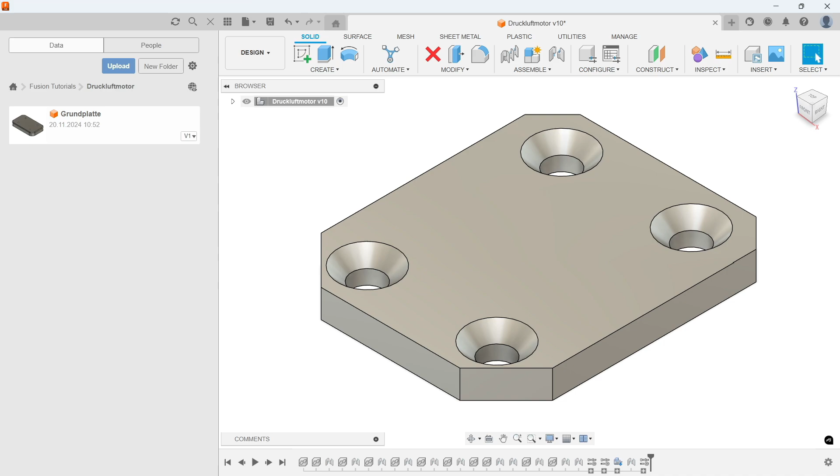It has 4 countersunk holes. While creating these holes, you will learn 3 new functions: how to reuse sketches, how to insert holes using the hole tool without a prior sketch,

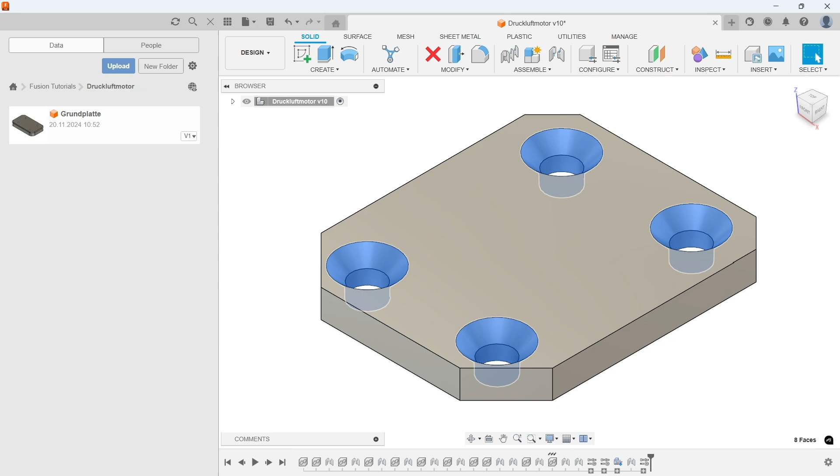and how to position them precisely using a rectangular pattern.

Furthermore, you will learn how to create the differently executed chamfers with just a single chamfer element.

At the end of the tutorial, we will show you how to change the material from steel to aluminum and display important component information such as mass, volume, and center of gravity.

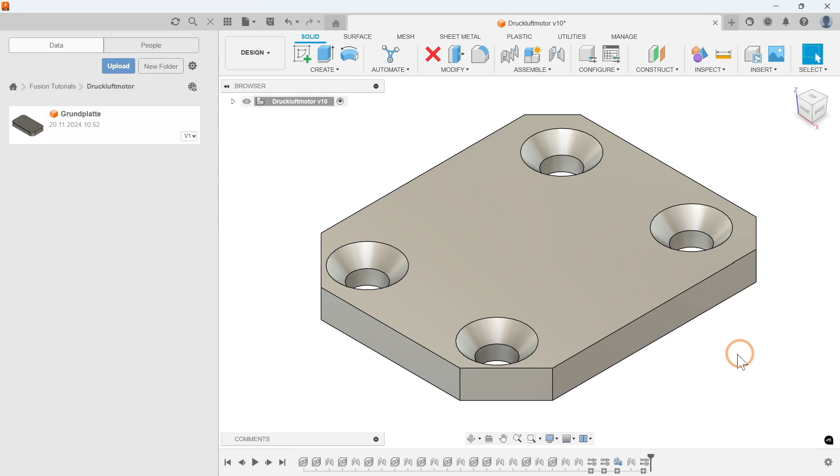We start with the construction by clicking on File and then on New Construction as before. It is advisable to save the component right from the beginning.

We assign a meaningful name to the cylinder head plate and confirm the entry. The file for the cylinder head plate is now added to our folder. To create more space in the workspace, we then close the data panel.

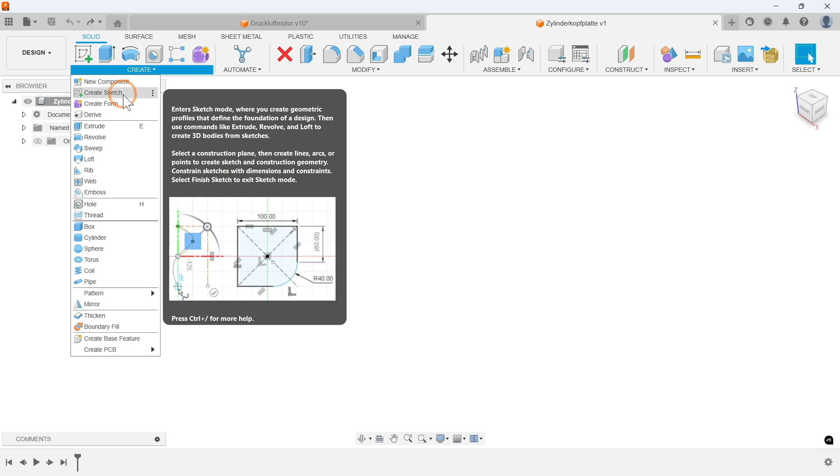As the next step, we create a sketch on the XY plane. We do this by clicking on Create Sketch and then selecting the XY plane in the browser or directly in the workspace.

As with the base plate, we now create a center rectangle starting from the origin, using the dimensions 25 by 30 millimeters. The input is completed with a click of the left mouse button.

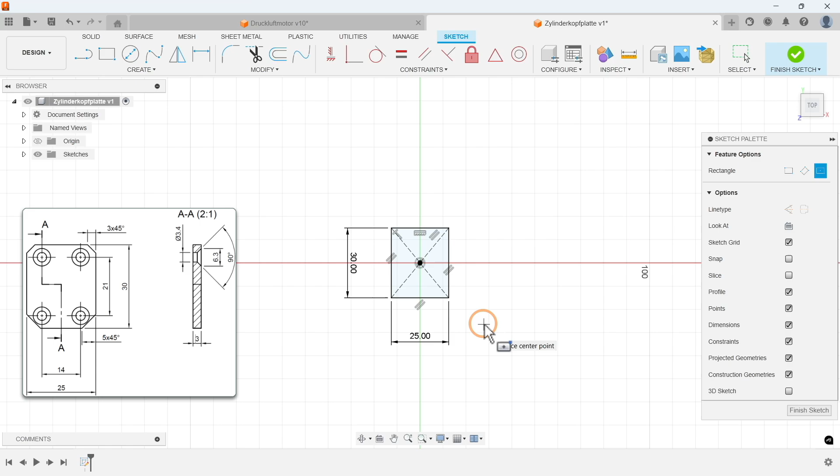This keeps the center rectangle command active, allowing you to create more rectangles. Now, we create another center rectangle, also starting from the origin, this time with dimensions 21 by 14 millimeters. This rectangle will serve as a reference for positioning the drill holes later.

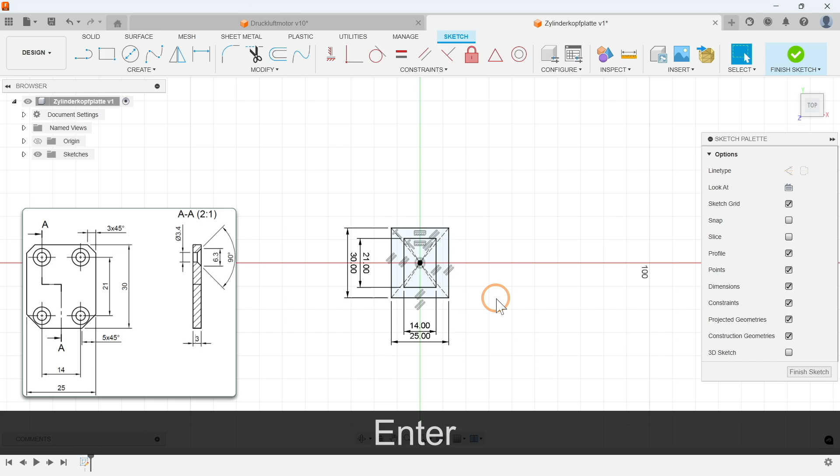To properly mark the reference line, we change the lines to construction lines. We could have activated this command beforehand, but alternatively, we could mark the lines now and then convert them into construction lines.

To mark the lines, we can hold down the left mouse button and use window selection to select all the desired lines. It is important to note that it does make a difference whether you drag the window selection from left to right or from right to left.

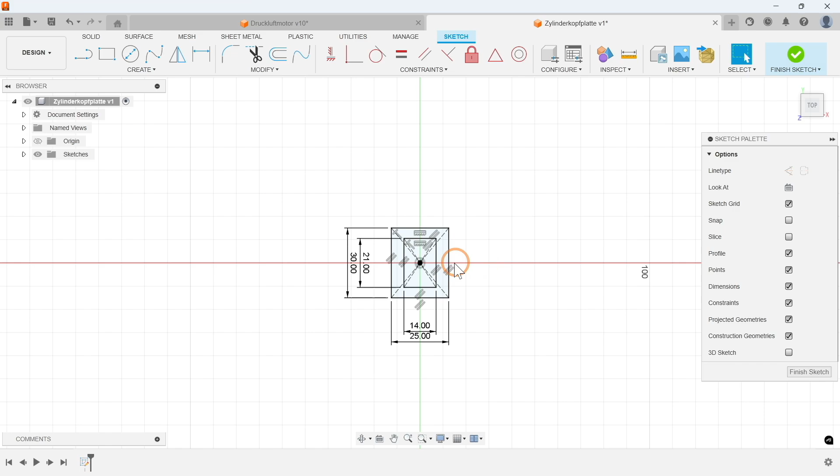From left to right, only the objects that are completely within the rectangle are selected. This selection is indicated by a solid rectangle.

From right to left, objects that are only partially within the rectangle are also selected. This selection is represented by a dashed rectangle. This difference is helpful when you want to select or avoid specific elements.

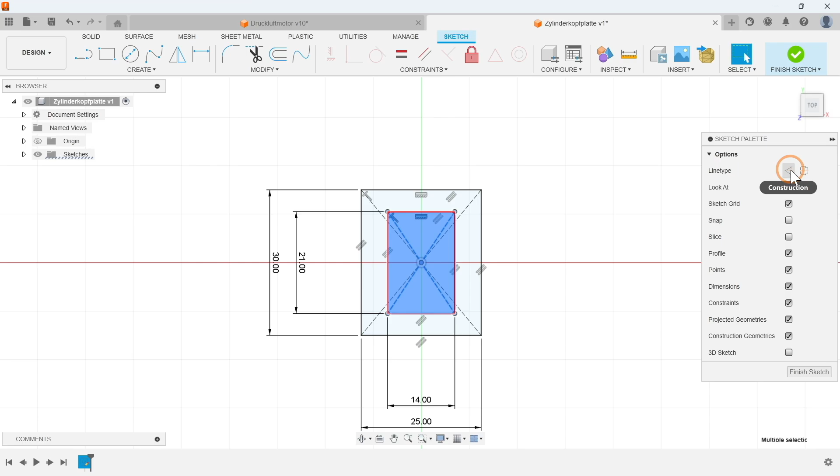After selecting the inner rectangle, we can convert it into construction lines in the sketch palette.

Now you can directly finish the sketch and simultaneously call up the extrusion using the shortcut E. It's noticeable that our rectangle with the outer contour is automatically selected for the extrusion.

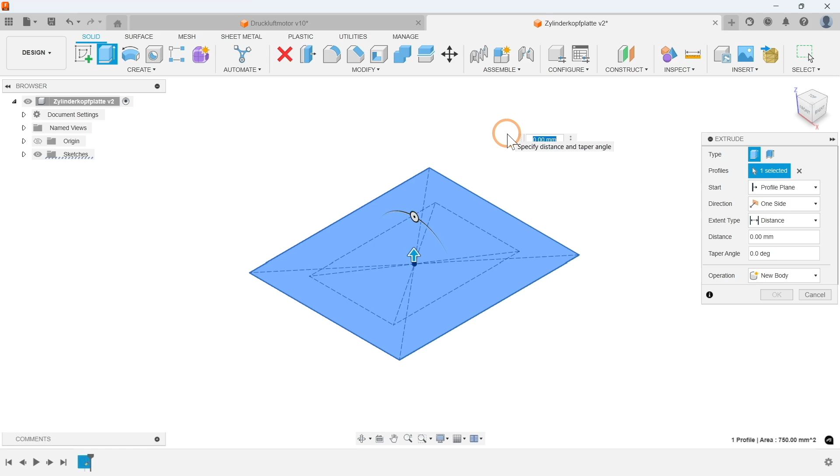Since we couldn't select the rectangle with the construction lines, now we use a measurement of 3 millimeters and see that, as last time, a solid is created.

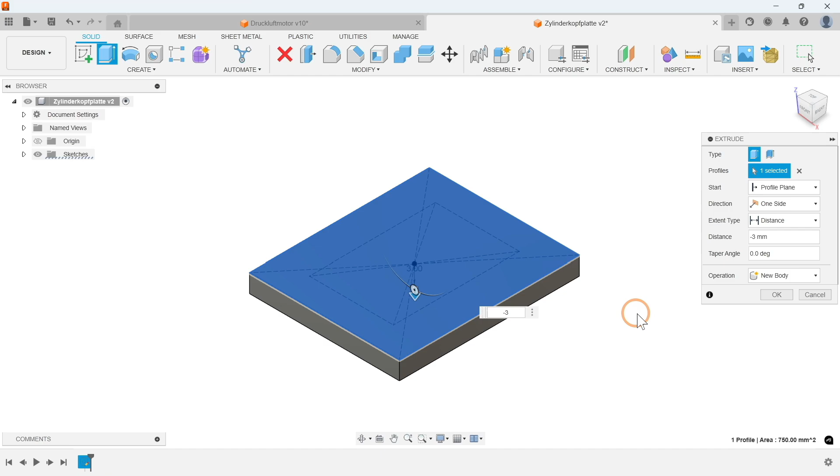Since we want to reuse the sketch for the countersinks, we should not create the body above the sketch, but below it. Therefore, we enter a distance of -3 millimeters and see that the body is generated in the other direction.

Now, we select the command hole and use the sketch that we already used for the extrusion again by making it visible in the browser.

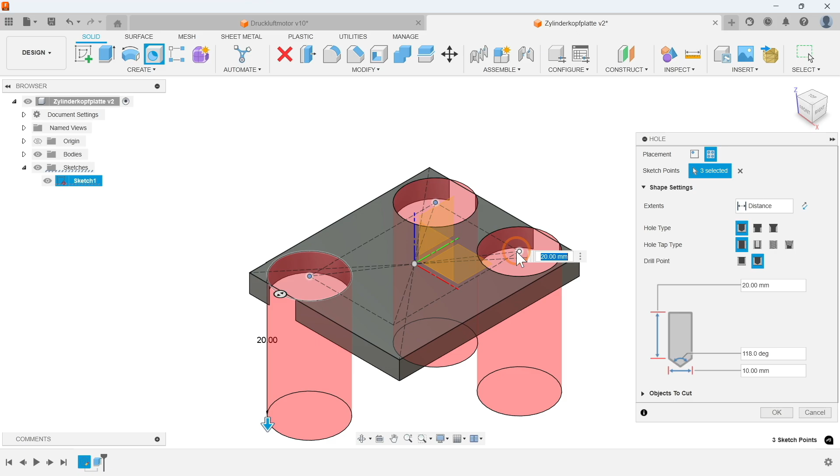The holes are placed on the side where the sketch is located. This becomes particularly clear when we activate the conical countersink option for the hole type.

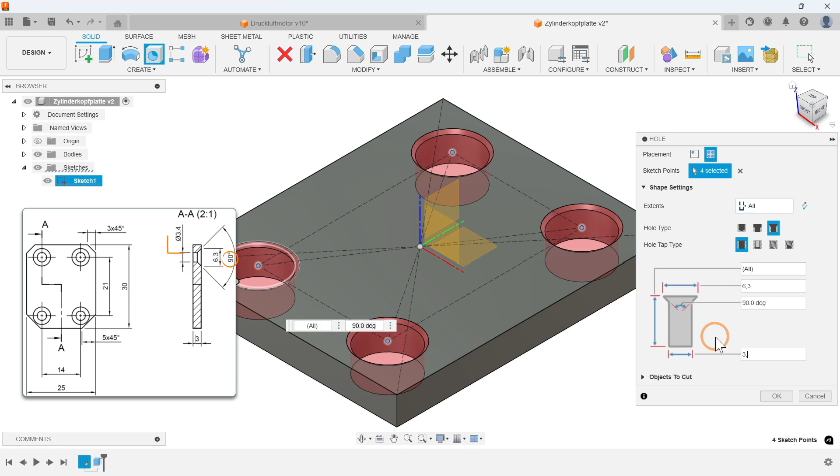Under Extents, we set it to All to allow the holes to go through the entire plate. For the hole tap type, we choose Simple. We set the diameter of the conical countersink to 6.3 millimeters, leave the angle of the countersink at 90 degrees, and choose a drilling diameter of 3.4 millimeters. We confirm our entries with OK or Enter.

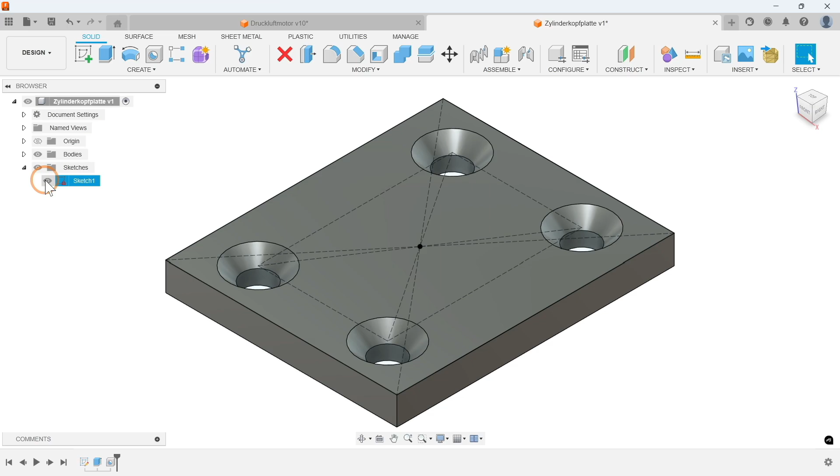The component is now mostly completed. In the construction history, as last time, all our previous steps are listed. Additionally, we see that the sketch is still visible. To make the workspace clearer, we will now hide it.

At this point, we would like to look at an alternative approach. Feel free to follow along with the steps to discover new features, or simply fast forward if you'd like to skip this part. First, we remove the previously created hole from the construction history.

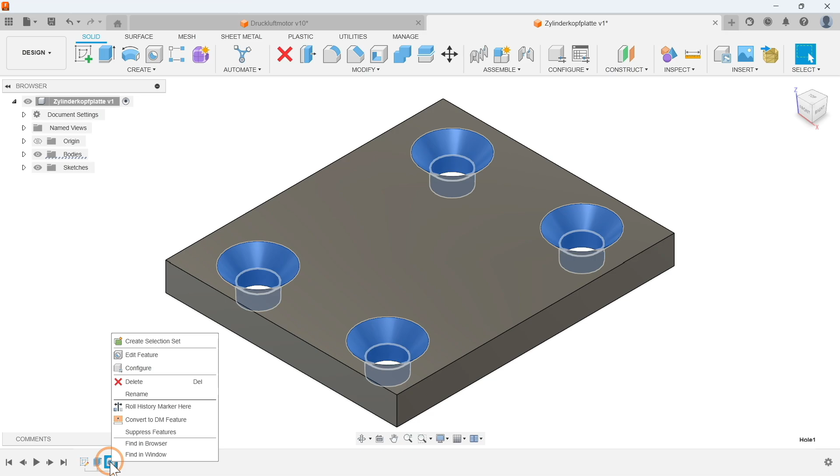To do this, we right-click on the hole element and select Delete. Alternatively, the Undo command can also be used. Now, we select the Hole command again and click on the surface where the hole is to be created.

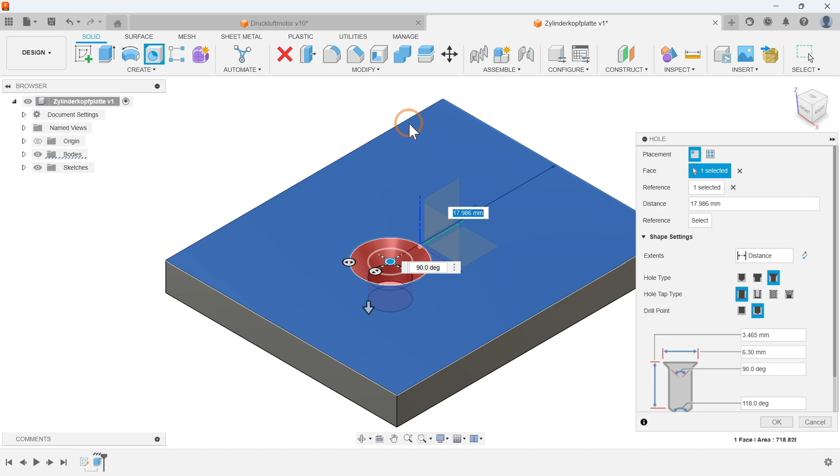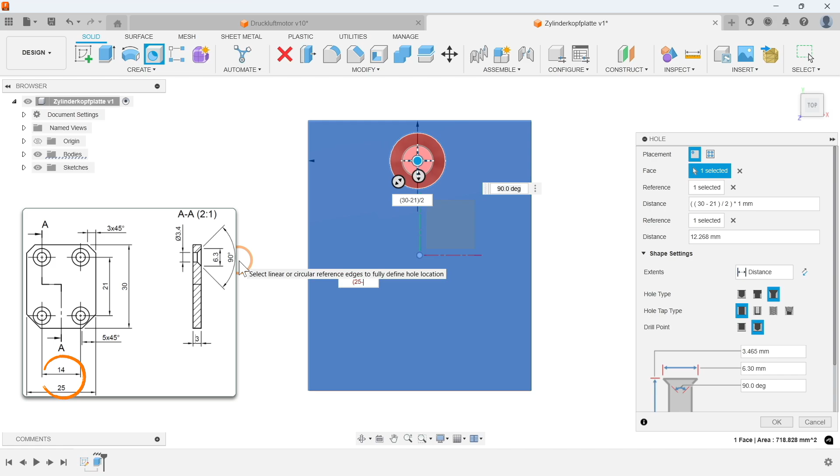Then, we click on the top and side edge and position the hole by calculating the distance. For the top side, we use the formula (30 minus 21) divided by 2. For the other side, we use (25 minus 14) divided by 2. Once the position is correct, we confirm the action with OK.

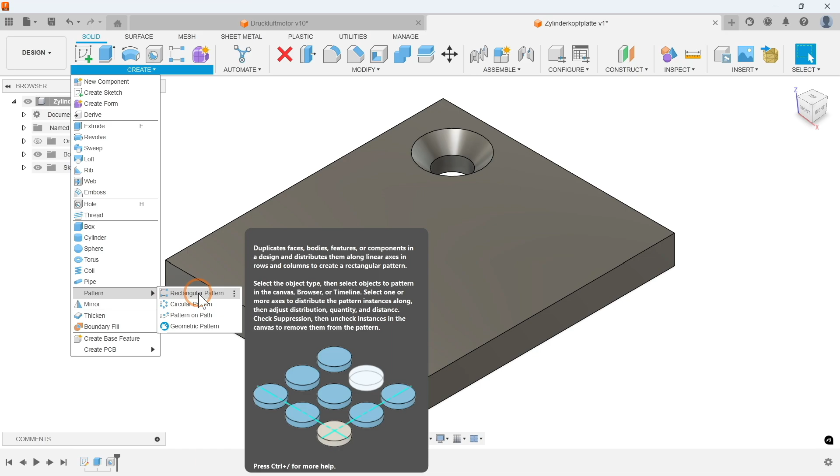Now we create the missing holes by arranging the already created hole. In the toolbar, go to the Solid Bodies section, select Create, then choose Pattern and subsequently Rectangular Pattern. Set the object type to Features.

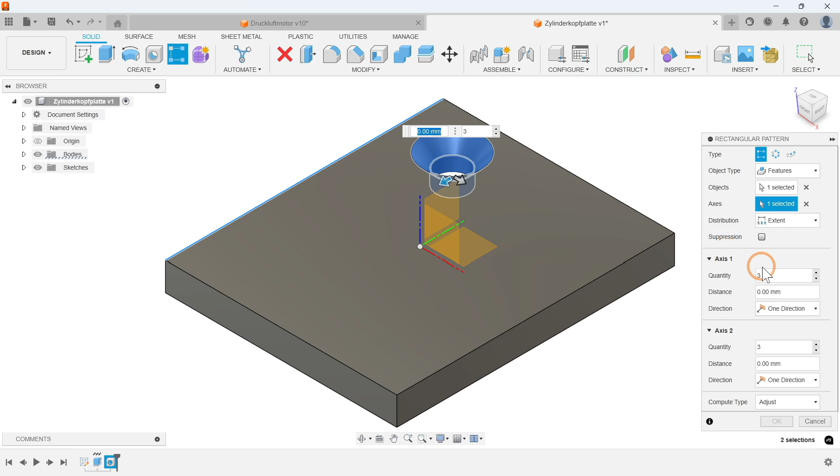Choose the hole element for arrangement either in the design history or directly in the model. Select a side edge of the model for the axes to determine the direction. Set the number of elements for axis 1 and axis 2 to 2 each, and enter distances of 14 and 21 millimeters. Then confirm the process.

If you made a mistake during input, you can simply double-click the element to call it up again and make changes.

Now we are back where we were before, but through a different path. There are always many different ways to create a component.

We are still missing the chamfers on the component. For that, we go to Chamfer in the Modify toolbar.

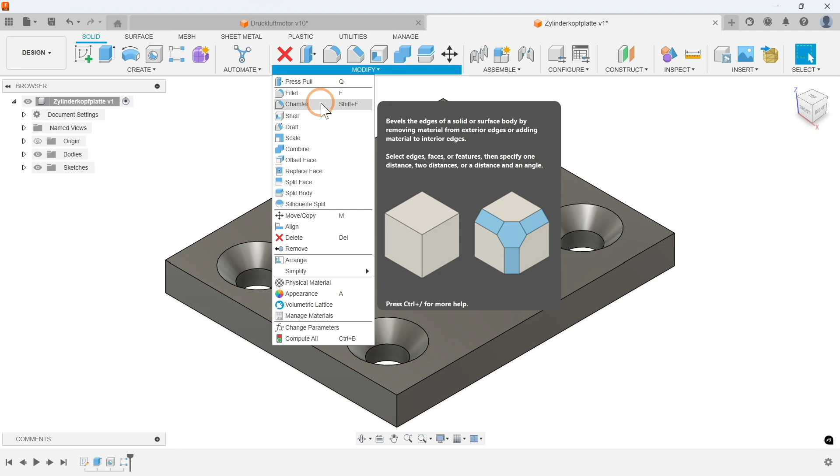First, we click on the two upper edges and enter a chamfer of 3 millimeters. Then we click on Add a selection set and choose the two lower edges to add a bevel of 5 millimeters.

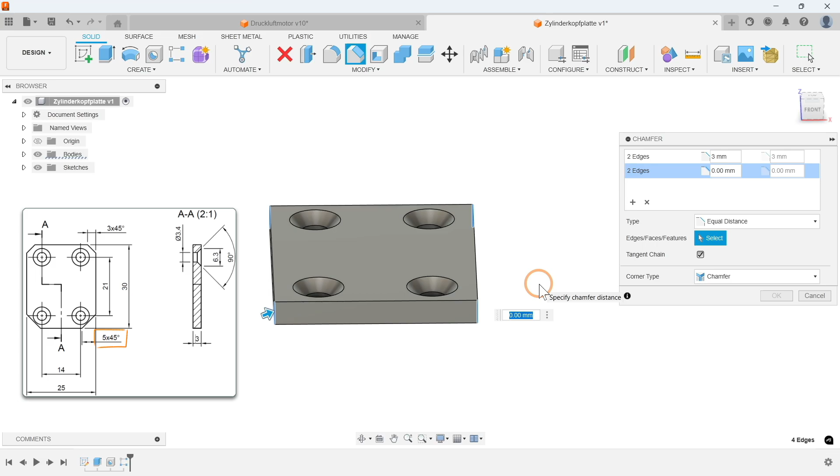You could also have completed this step in two separate steps, by first creating a chamfer element of 3 millimeters and then another chamfer element of 5 millimeters.

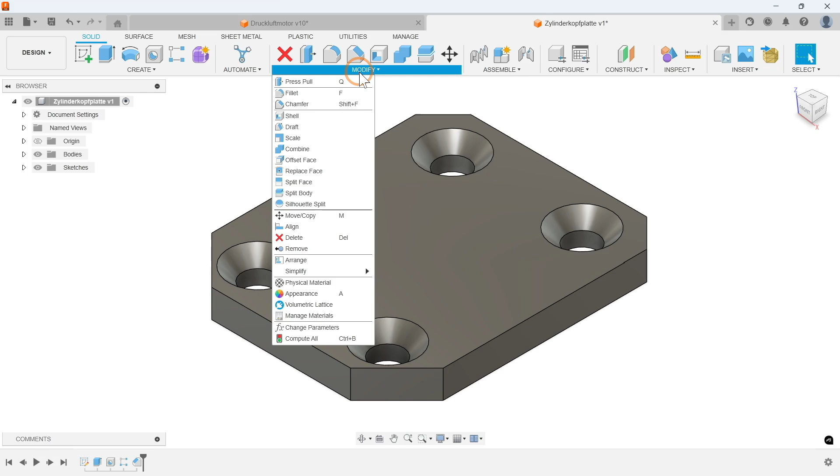To correctly calculate the physical properties such as mass, volume, or center of gravity, we will now change the material of the component. To do this, we go to the Modify toolbar and make the change under Physical Material.

The Material library opens, where the material aluminum can be found in the Metal folder. To apply the material to the component, we simply drag it onto the body.

After the material has been successfully changed, we can view the component information such as weight, volume, and center of gravity. For this, right-click on the component in the browser and select Properties.

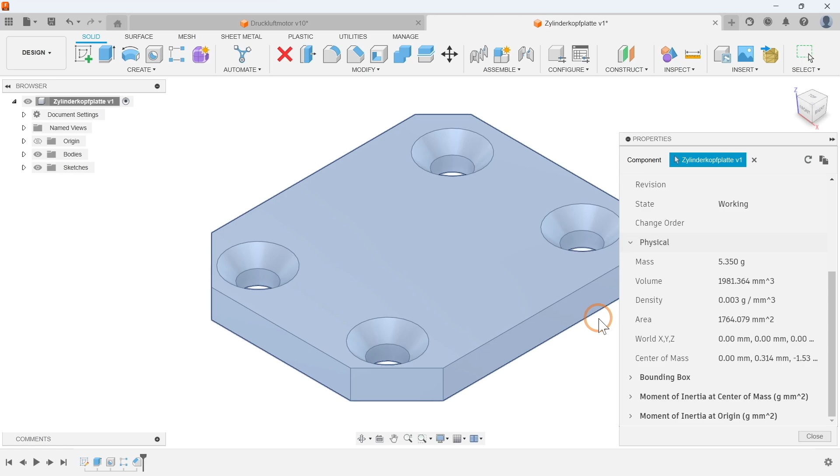Here, you can now see the updated data of the component, including the weight, volume, and center of gravity. We save the component again.

Congratulations! You have successfully created the second component of our compressed air motor. You have the opportunity to review the entire construction process to understand all the steps precisely.

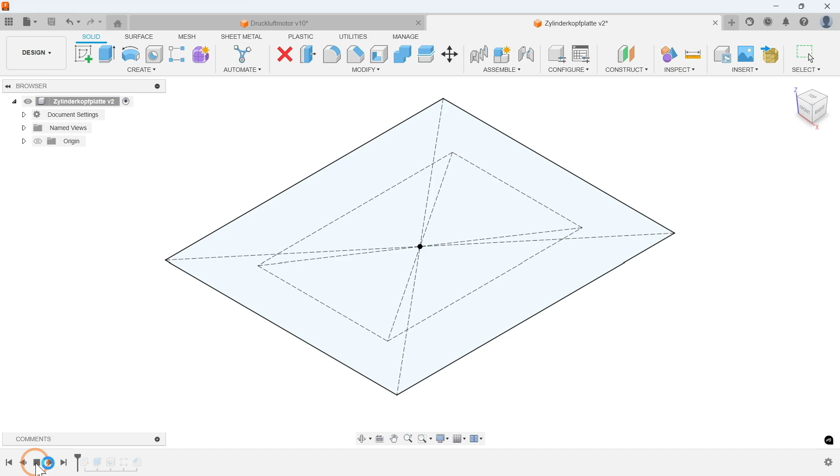First, you learned how to reuse sketches. Additionally, you learned how to create and arrange holes without a prior sketch. You are now familiar with creating multiple chamfers in one step, and you know how to adjust the material of a component to display details such as mass, volume, and center of gravity.